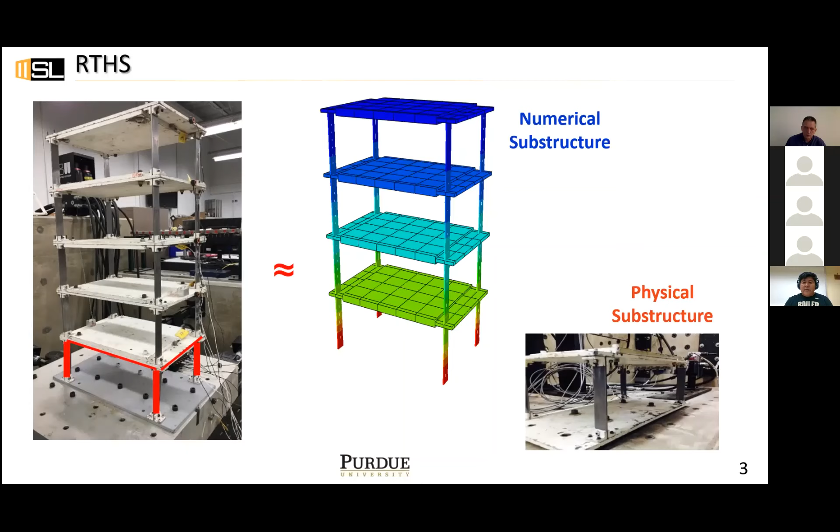Let's say we have this 5-story building, and imagine the first story is built of some unknown material. We split the complete structure and model the upper part of the building as a numerical system, while we build the bottom part in the laboratory. Then we connect these two subdomains using a transfer system in a closed feedback loop, in real time.

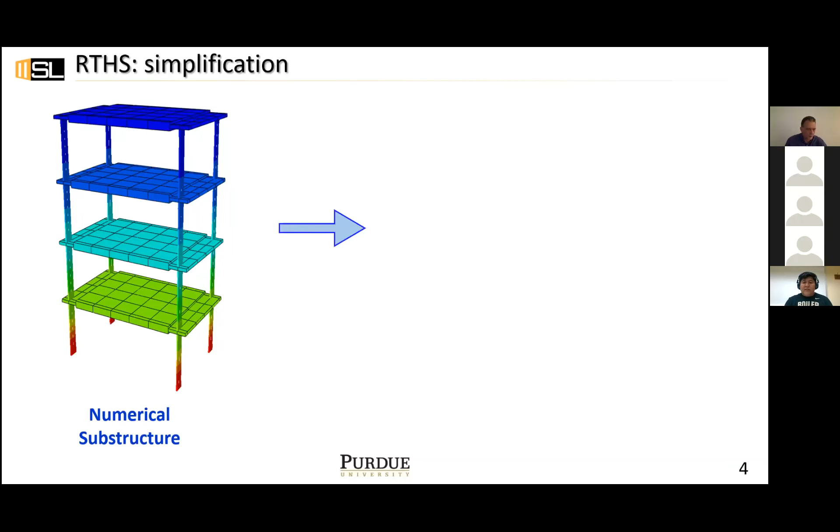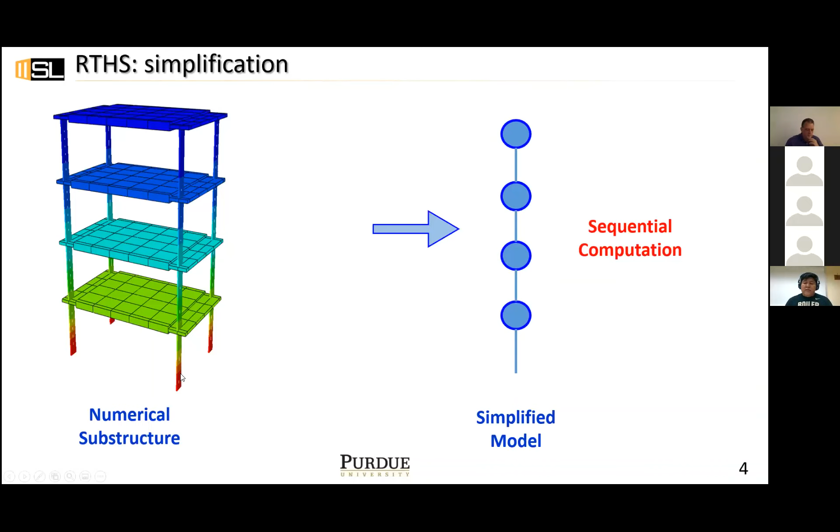However, we've been using mainly and successfully these simplified models in sequential computational platforms, and there's nothing wrong with that—it allows us to explain the global behavior of the building. But what happens if we need to investigate the local effect of a failure in a column? For that, we need different models.

About 4 years ago, this MECHS project started, and we got together in 2 previous workshops and came up with some barriers that need to be overcome to extend the application of hybrid simulation. For me, I've been focusing on the design of control systems for the transfer systems, real-time parallel computation platforms, and especially nonlinearities and uncertainties.

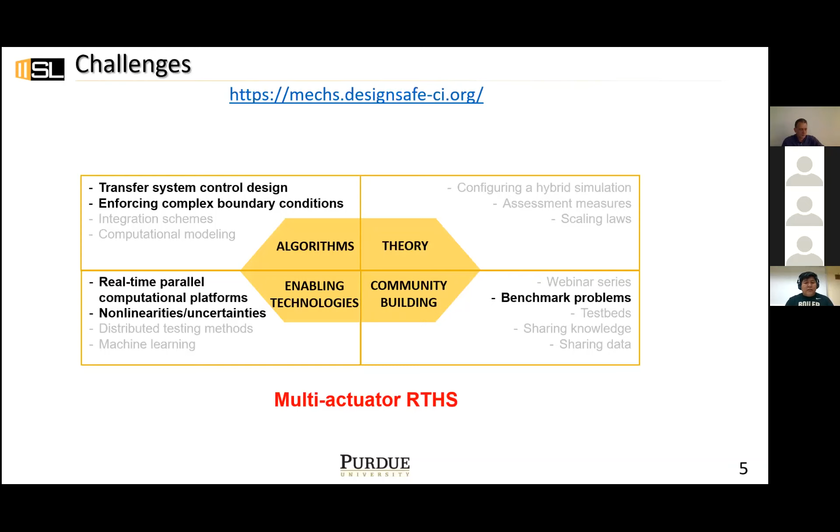But now I'm also including complex boundary conditions and benchmark problem definitions, so I'm tackling multi-actuator RTHS problems. In this conversation, though, I'm going to talk especially about real-time parallel platforms.

So what is CyberMech? It's composed of 3 elements, 3 pieces of code, and it's also a collaboration of a team of teams. First we have this real-time parallel engine—we call it a clustering launcher—which schedules all the tasks and resources for the computer, developed by computer scientists at Washington University in St. Louis.

Then we have the finite element solver, which does the analysis of the structure, developed here at Purdue. And I have developed the hybrid simulation management platform, which provides tools for modeling state space systems, nonlinear models, controllers such as PID, robust linear controllers, nonlinear controllers, Kalman filters, particle filters, and handling signals as well. Actually, the HSM is the interface to design the RTHS experiment. These 3 codes reside on a Linux machine with a real-time patch and are written in C and C++.

So how does this work in CyberMech? Here you can see at the top these 3 rectangles that represent the 3 cores. Let's say CyberMech has true parallelism.

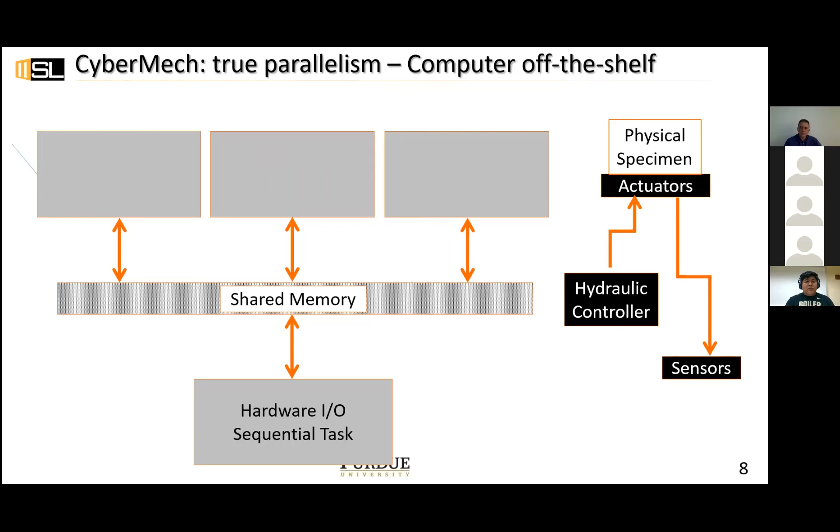This means that for a system to have true parallelism, it needs to implement first inter-task parallelism, which means different tasks can be sent to different cores. But at the same time, it needs intra-task parallelism, which means that one task can be split across different cores.

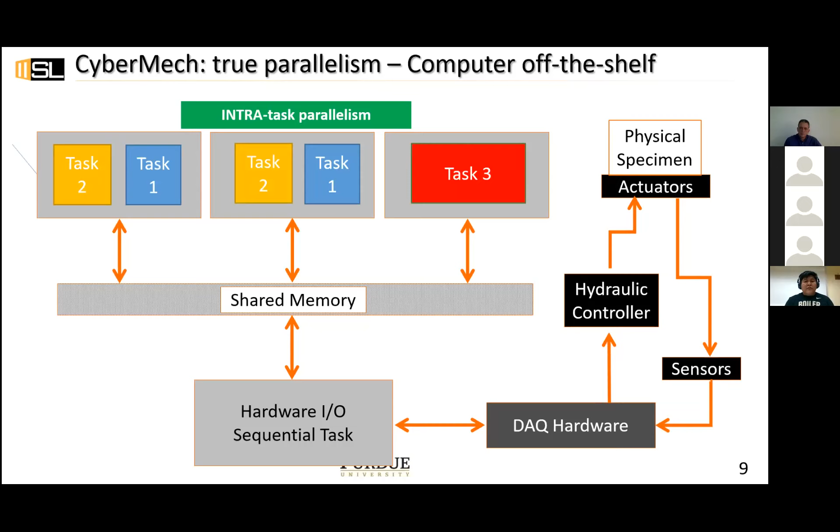It's worth mentioning that this system is designed for off-the-shelf machines. So why do we need these parallel computing systems?

Well, to improve the quality of RTHS, we do this by increasing the number of degrees of freedom, doing higher frequency tests, and developing and implementing advanced controllers.

In this case, let's focus on this specific topic. This is the sketch for the real-time hybrid simulation. You have the numerical substructure on the left, the physical substructure and the plant, and the controller in the middle.

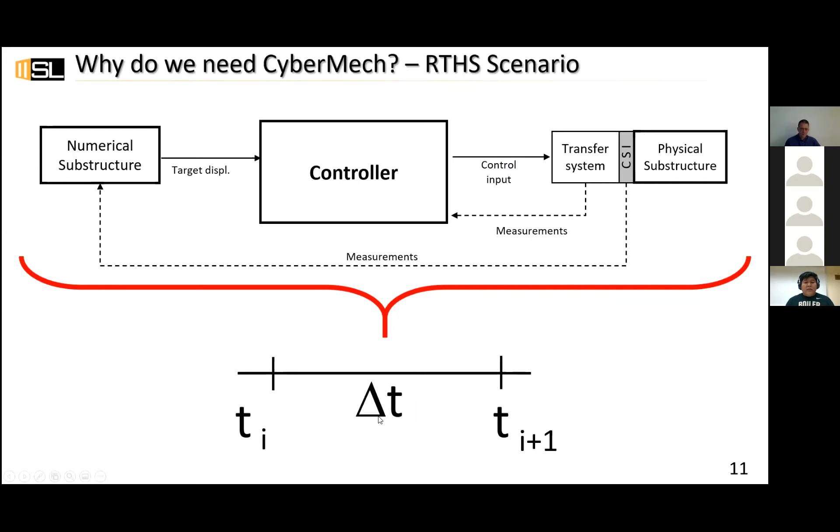The controller compensates for delays and dynamics of the transfer system. Something very important is that all these tasks need to be computed within every time step, and that's when we make sure we're conducting true real-time experiments.

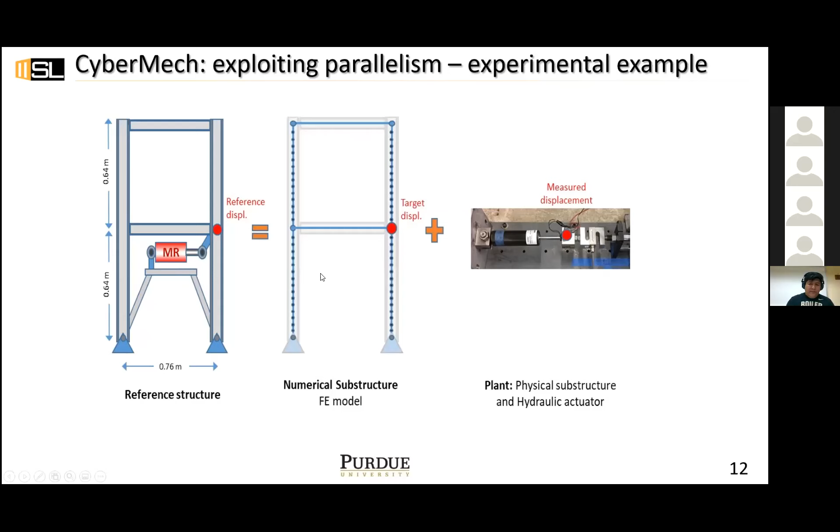But in this case, we are using CyberMech, so we use finite element models and finite element software, meshing the columns with models ranging from 10 degrees of freedom up to 1,000 degrees of freedom. So we have the numerical substructure here, the plant on the other side, and the real controller.

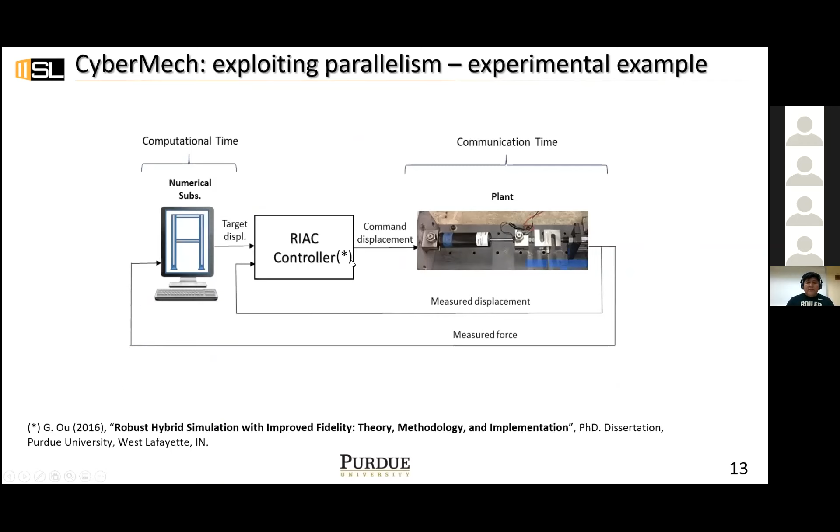Which is a robust linear controller in the feedback loop. Actually, what I use here is a 24-core machine.

It's worth mentioning that this CyberMech code resides in only one machine. There's no need to have a target and a host machine. So you develop the experiment, compile the system, and run it all in the same machine.

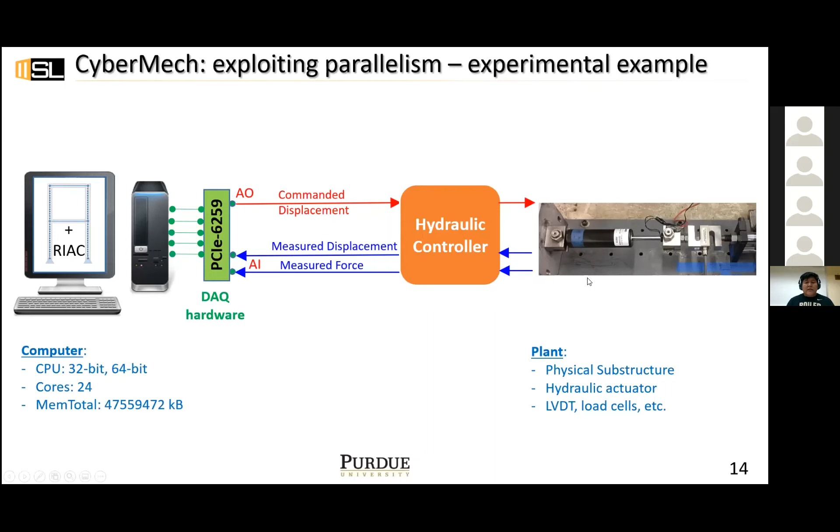So you have some data acquisition hardware, the servo hydraulic controller here, which communicates with the plant, and we form the closed loop in this way.

When we tried this example with some nonlinearities, we were happy to know that those cases using finite elements of the frame, from 10 degrees of freedom up to 1,000 degrees of freedom, were successful without instabilities, and the responses were similar between each other, which is pretty good.

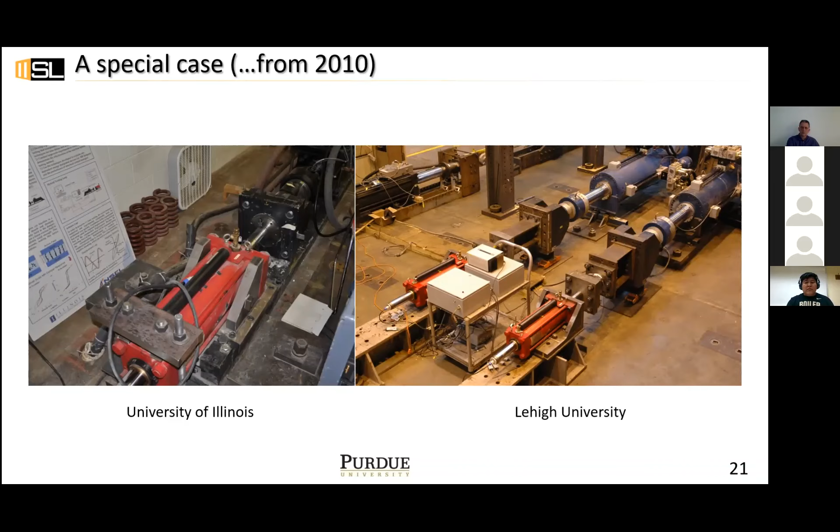So let's say in this case, here we have big MR dampers, and in those experiments, these MR dampers went from passive on to passive off, back and forth, and the controller was a linear controller, and it shows instabilities. Because of this, it has many causes, but in general, for having a high performance and high quality RTHS, it's very important to have a control approach able to handle these changes or nonlinearities. So for us, in our approach, we are dealing with unknown plants and also highly nonlinear plants.

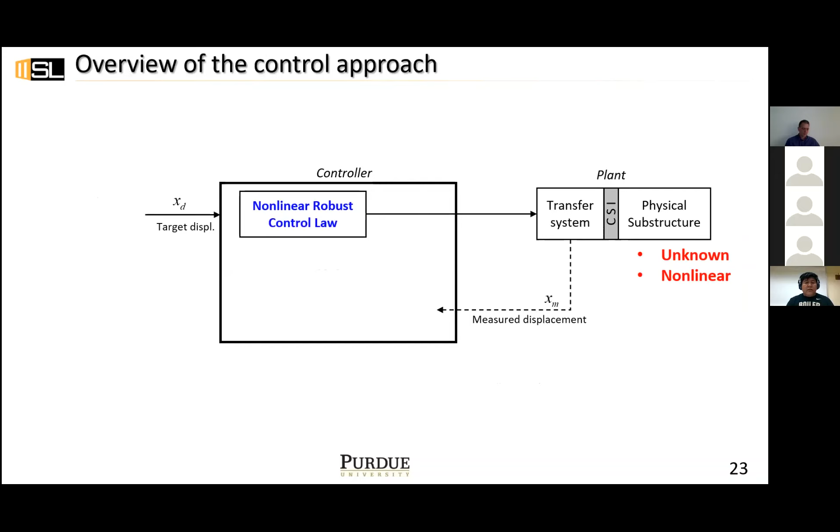And what we develop is a controller that is composed of a nonlinear robust control law and a nonlinear estimator. So let's say if we are trying to control this small shake table, in which the nonlinearities come from the friction on the bearings and from the control input saturation, we implemented this sliding mode control law and the nonlinear particle filter here, particle filter estimator.

The feature of this sliding mode control approach is that it needs all the states of the plant model. But on the other hand, this approach doesn't need to have an exact plant model or a model that is very close to the plant. It only needs an estimate of the plant that captures only the essentials of the dynamics.

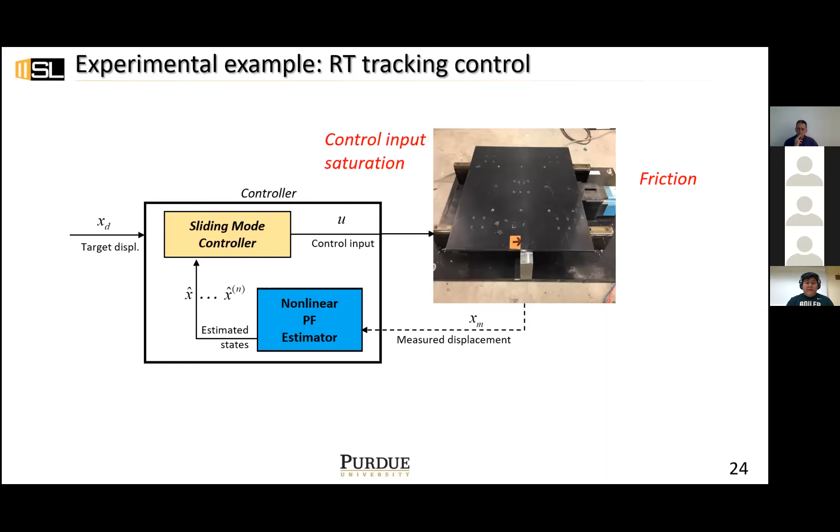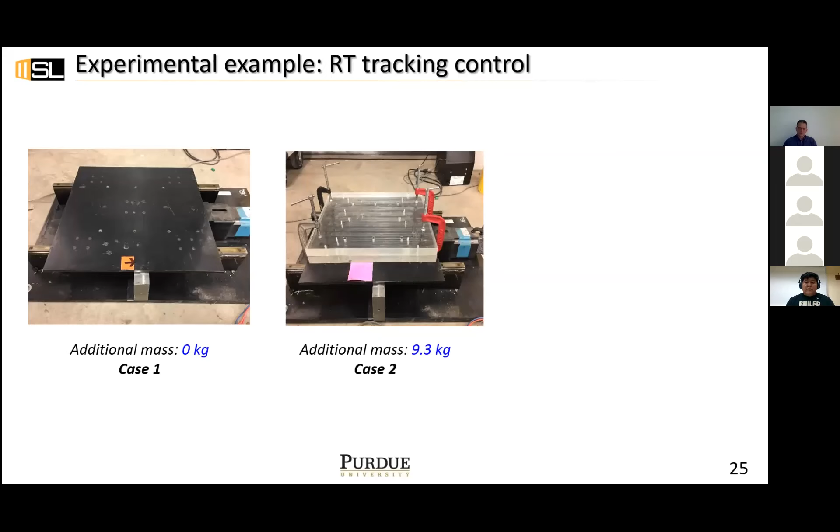Another nice feature is that it allows us to implement these uncertainties in the control law in a very straightforward way. So let's say we have case one, only the shake table, and we design a controller for this case with all these parameters, uncertainties, and nonlinearities. But then we have another case in which we add around 10 kilograms mass, and then another system which is 2.5 kilograms. So what we have done is design the controller for case one, and then run the same controller for case 2 and 3, and see what the performance is when changing these masses, also in the presence of these highly nonlinearities coming from the friction and the saturation of the input command.

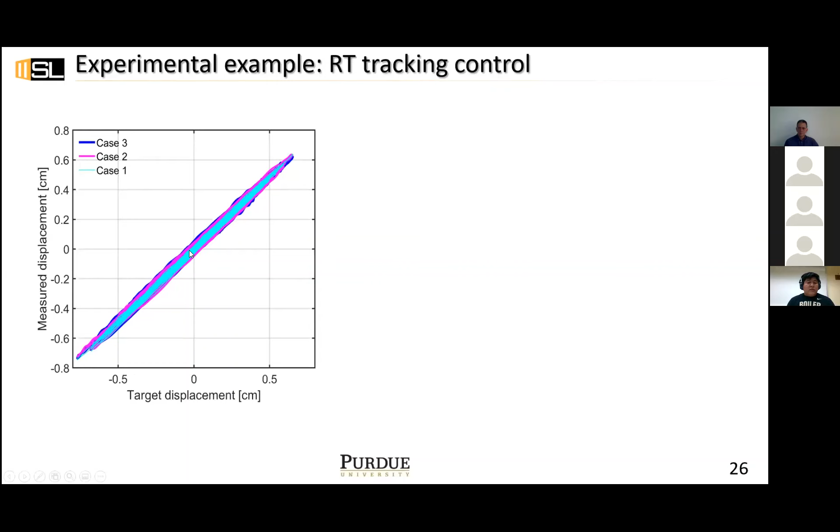As you can see here, we expected to have this behavior of the performance control, the tracking performance, in the x-axis the target displacement, in the y-axis the measured displacement. And if we increase the mass, obviously we are going to have these wider loops, which means the error is increasing. Actually, the numbers are pretty good considering that we're dealing with high nonlinearities and uncertainties of this mass. By the way, I think the mass of this small shake table is around 25 kilograms, which means this is around 50% additional mass.

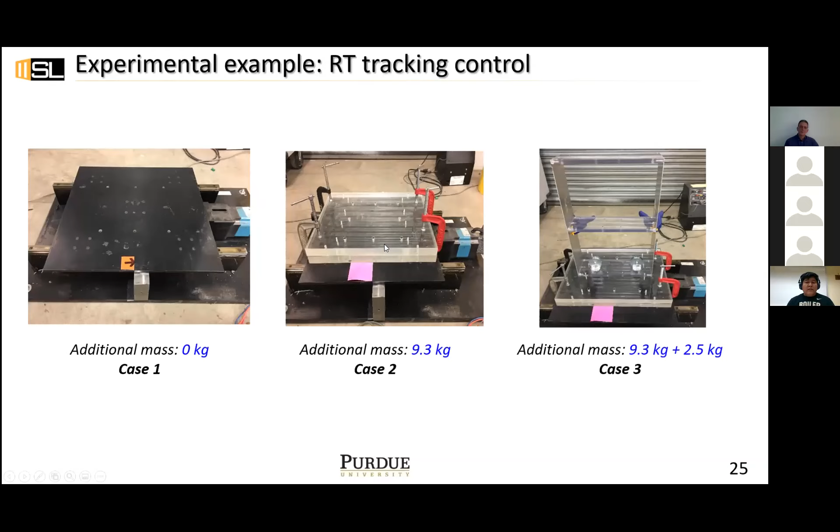So, but beyond the tracking control performance, what are the benefits of being able to run higher frequency tests?

As you can see here, in this experiment, we have 3 tasks: the control law, communication overheads, and the particle filter. The time that it takes for CyberMech to compute each of these tasks is about these numbers on every time step. And here, the total time step tells us that we are able to run these experiments at 6,000 hertz.

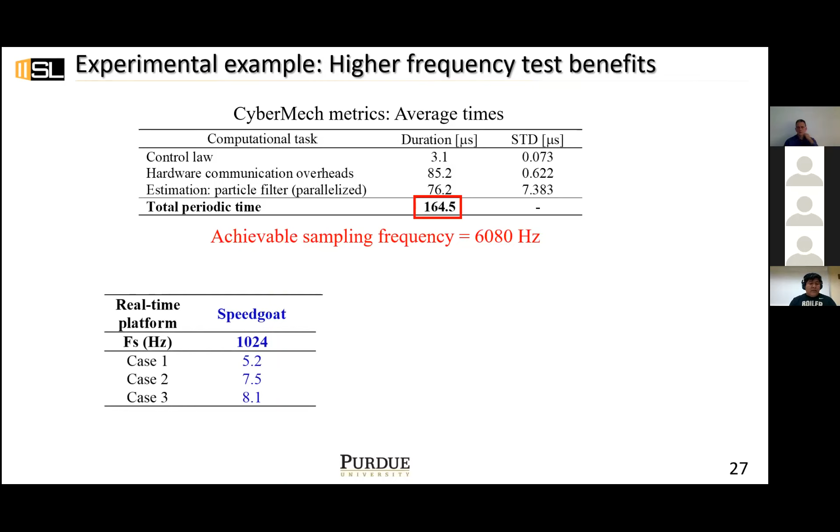And the impact or the benefits of doing this is the following. For real-time platforms, the Speedgoat, I have included the Speedgoat here just for reference. We have the 3 cases here. If we use CyberMech and run it at 1,000 hertz, we have similar numbers for Speedgoat, so our system works as expected. But as soon as we started increasing the sampling frequency, the errors also decrease. And for case 3, which is the worst case, the one that has more change in the mass, it goes from 8% down to 2% error. So 3.5 times smaller.

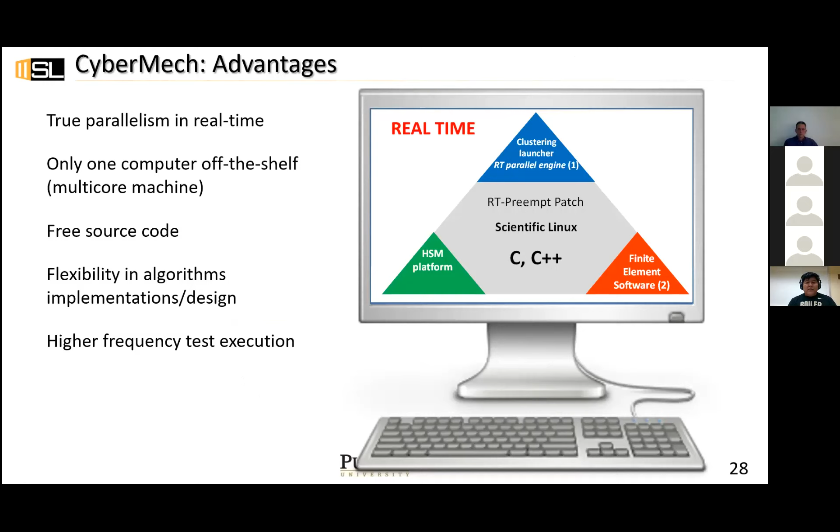The advantages of CyberMech is it has true parallelism, and you need only one computer off the shelf. It's free. You have a lot of flexibility in developing and implementing algorithms, and you can do higher frequency test execution. And it's very efficient in terms of money as well.

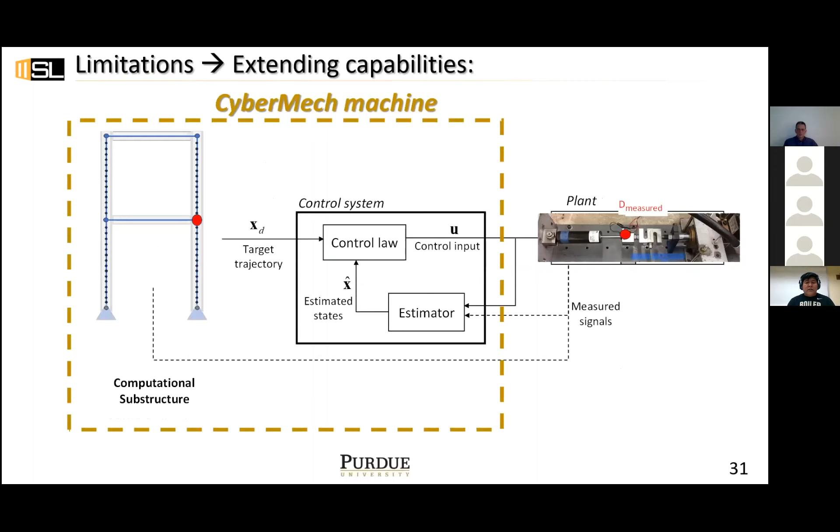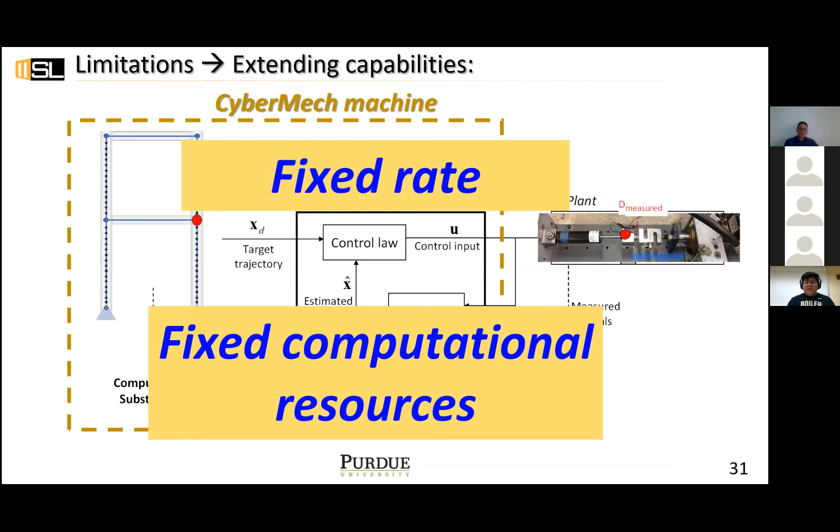So what I'm doing currently is that even though CyberMech has a lot of great features, it also has limitations. For instance, it runs at a fixed rate, which means the resources of the computer are fixed during the whole experiment or simulation. This is where elasticity plays a huge role.

This concept of elasticity is based on handling two properties: the workload and periodic rate. The workload might change in a case. For instance, in a finite element model, the mesh might change, or if I'm using a particle filter for nonlinear behavior, I need to switch back to a Kalman filter for linear behavior. So the workload can change, and the required workload is not unique. That's a very nice feature to handle.

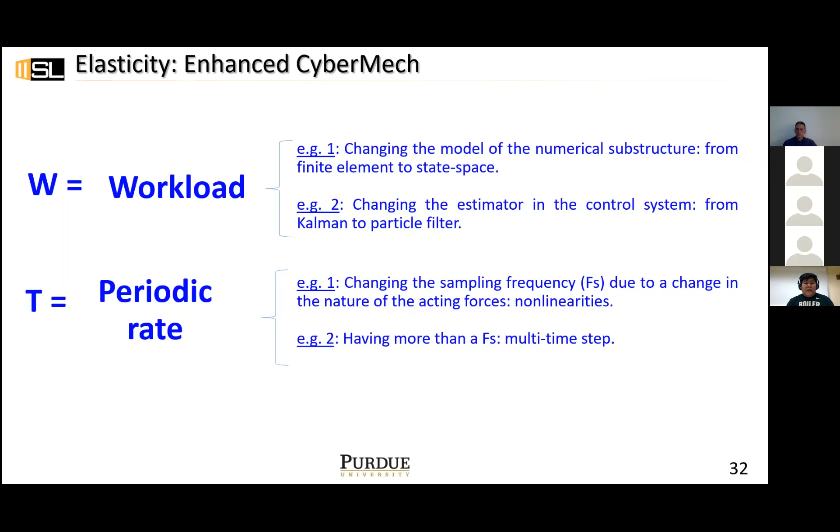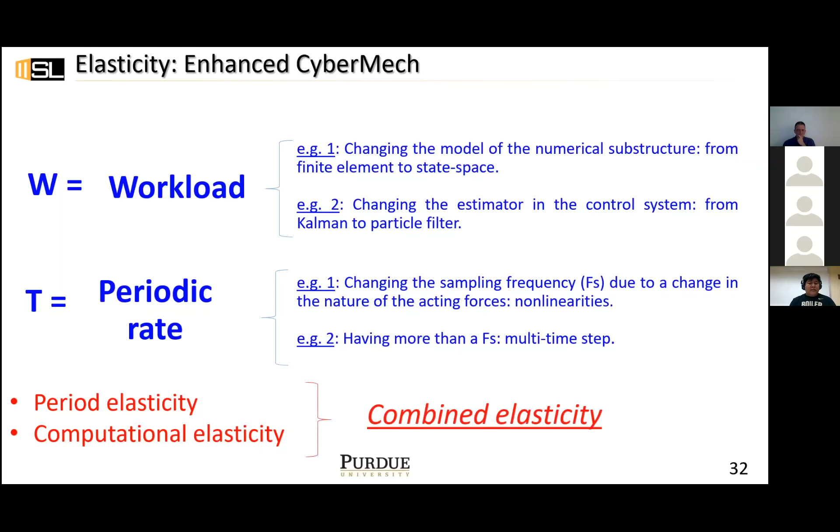Then we have the sampling frequency of the periodic rate, where we might need to change it. A good example is this pounding issue in base isolation systems. When there's no pounding, there's one set of constraints, but when we have pounding, this impact to the moat wall activates higher modes, and we need different constraints and models, running at a higher frequency to capture this higher dynamic. So if the system can change both the computational workload and the period, we say it has combined elasticity. That's what we've done as well.

At the beginning stage, we tried this in a virtual control problem, with a mode-changing plant that requires the use of a Kalman and particle filter. This example considers the change in the workload.

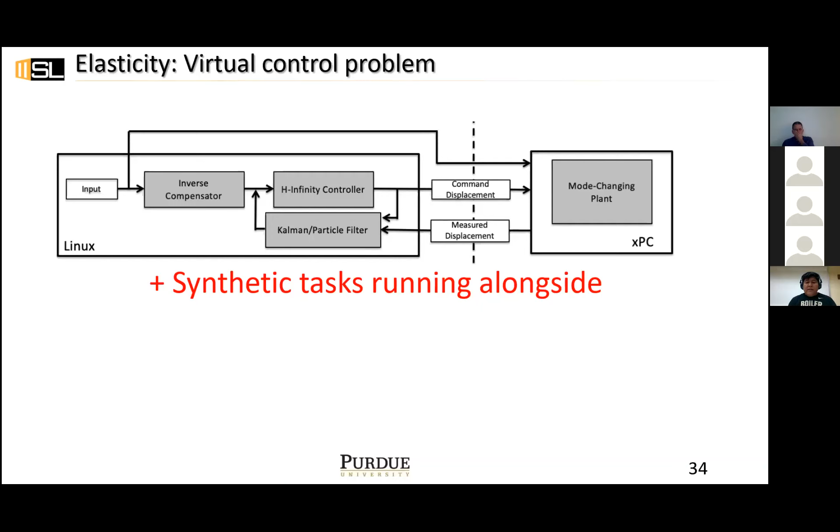But because this is a virtual control problem, we also implemented synthetic tasks that run along the simulation, trying to manage various operations. So we were looking for an example that could handle these constraints, the rate and the workload, effectively.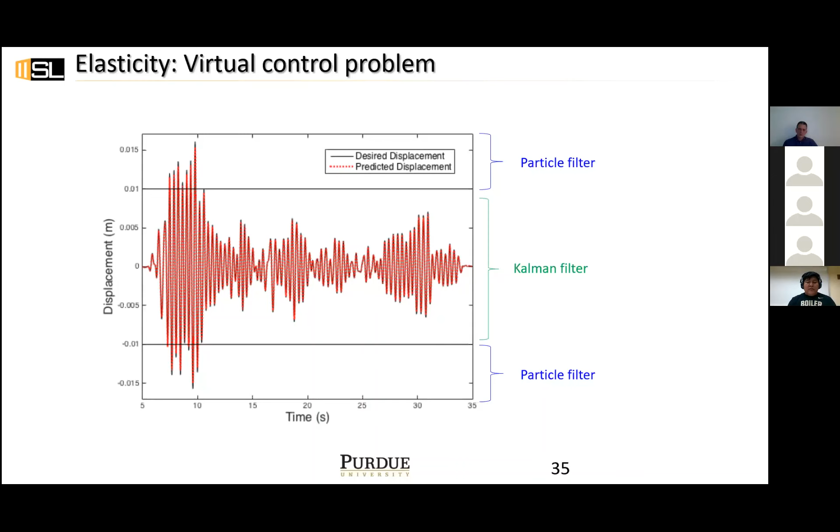This is pretty simple, but it proves the idea, and more importantly, that the platform works using this elasticity behavior.

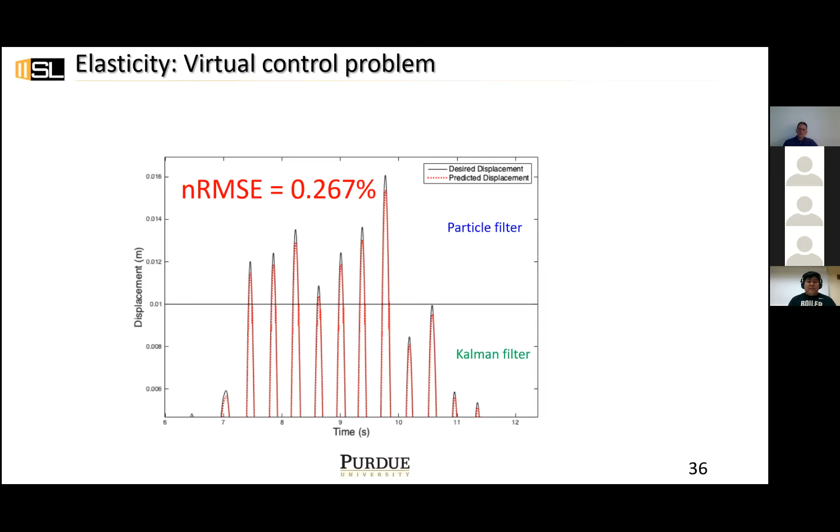Here is a small result which tells us it's good progress. Something relevant to say is that on the left you can see these results, with the x-axis showing the workload and the y-axis showing the period. On the left side is the Kalman filter, and on the right side is the particle filter. The blue diamond here corresponds to the RTHS, and the other one is the synthetic tasks.

The blue one, when running with the Kalman filter, has a workload of almost 500 microseconds, but when it changes to the particle filter, the workload changes. In the same fashion, the workload for synthetic task 3 is about 2,000 microseconds, changing to 5,000 microseconds. In this case, we are changing the period in synthetic task 1 from almost 2,000 microseconds down to 1,000 microseconds.

Finally, synthetic task 2, during the use of the Kalman filter, has these numbers for the period and workload, and it changes in the particle filter for both. All of this is happening in real time, concurrently, in parallel, and communicating between each other.

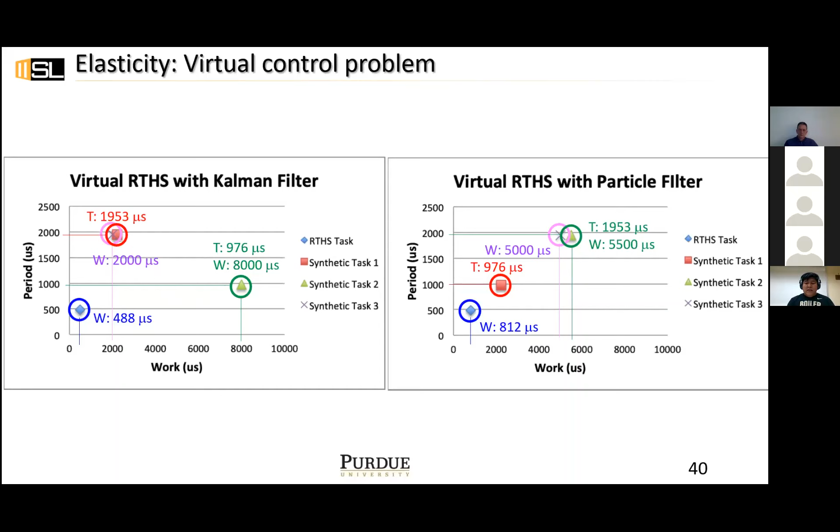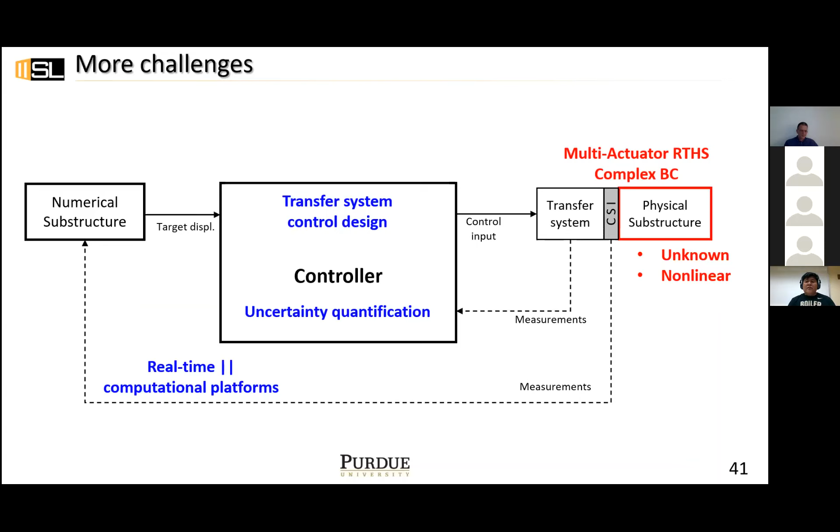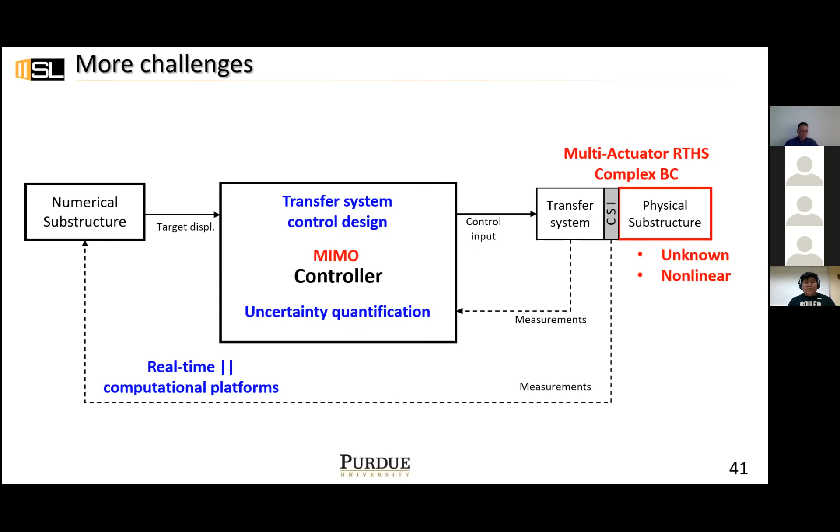Besides that, we have more challenges as well. One thing we are pursuing is multi-actuator RTHS, using complex boundary conditions. This is pushing us to investigate and extend our platform, our framework, to multi-input, multi-output controllers. The immediate goal is to come up with a benchmark, the linear RTHS benchmark for multi-actuator RTHS.

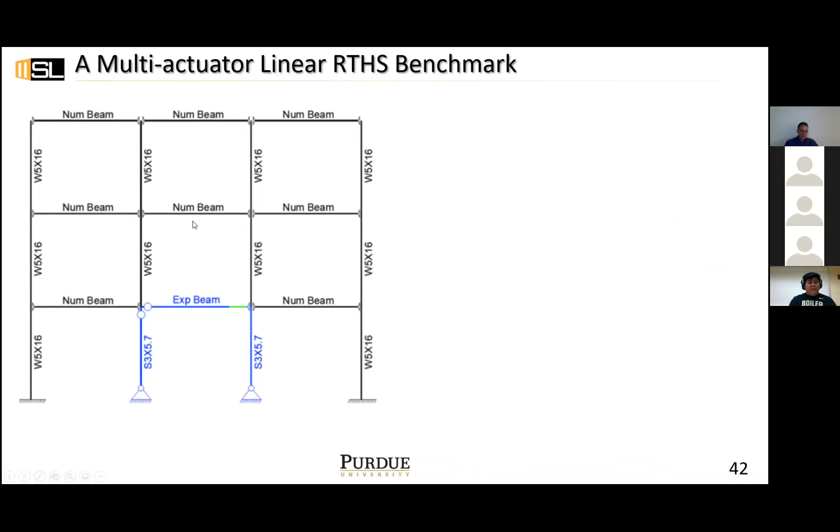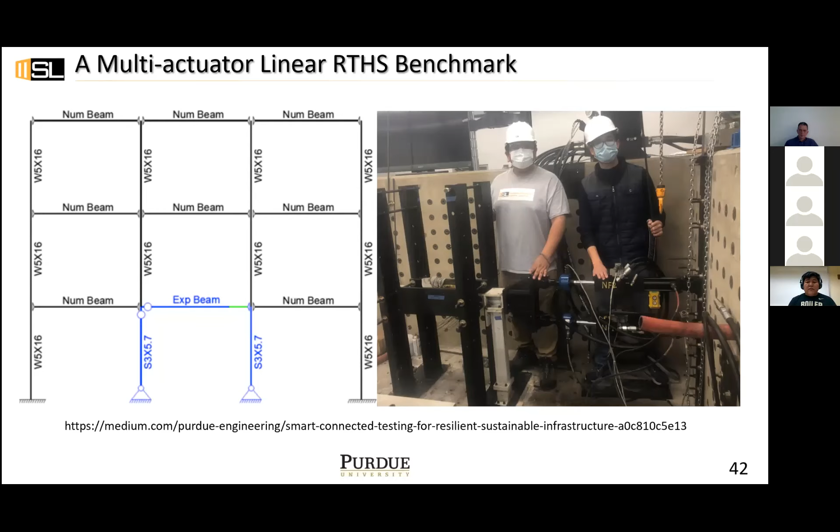We have here the numerical substructure, and the blue is the physical substructure. Here we have a picture of me and my partner, Manuel Cimarron, in the laboratory. We've started here, and the goal is to get to nonlinear behavior, but the immediate goal this summer is to release this RTHS benchmark for the community.

Of course, this is a huge project, huge task, and other people are involved. I'm just working on the controller and the computational resources, but other people are also working on this project in the models, in the finite element models, and in the design of the plant models, nominal models, and developing also the platforms, doing pretty interesting things. I'm pretty sure that in the next months we're going to release more important results about this project. Thank you.

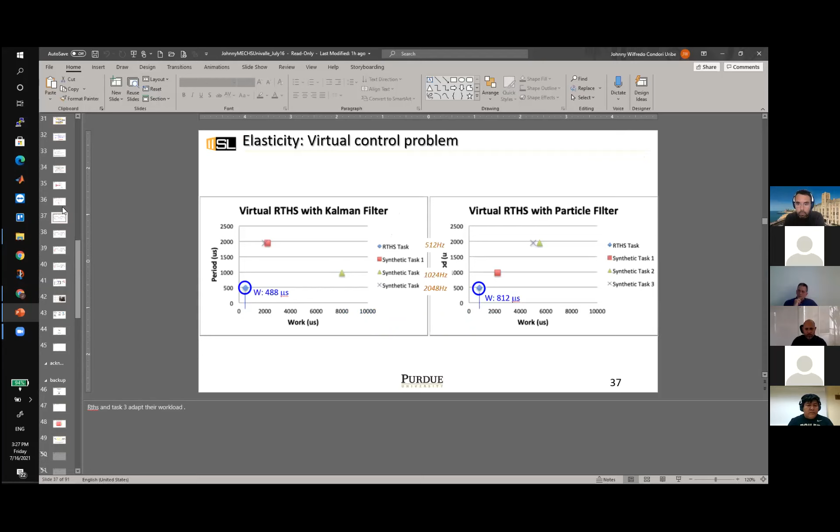Let me... it's here. Okay, so...

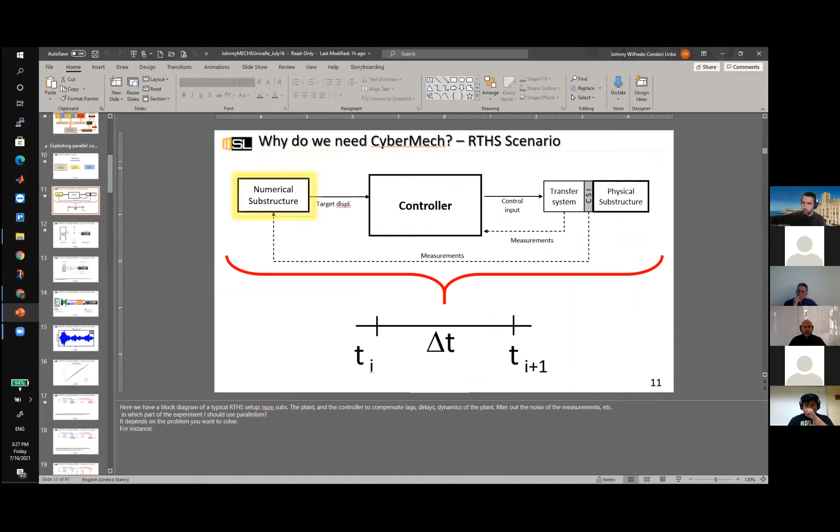For instance, that's a good question, and I haven't used OpenSees or other platforms myself, but my understanding is that, for instance, CyberMech, the finite element codes, the controllers, every piece of task that is designed and implemented in CyberMech runs and is controlled at every time step, and we have the capabilities of monitoring missed deadlines if there are any, so we make sure that the model is solved within the time step exactly. We also know if there are missed deadlines, and at what specific time this happens. My understanding from other platforms, including OpenSees, is that...

they run the model and expect the best of the system to be run. They expect the model to run within the whole time of the simulation. So if that platform can run it, it might have good performance. But actually, I don't know how they can make sure that at every time step the solution is provided before the next time step, just to get to the point. So I think that's my best answer I can provide.